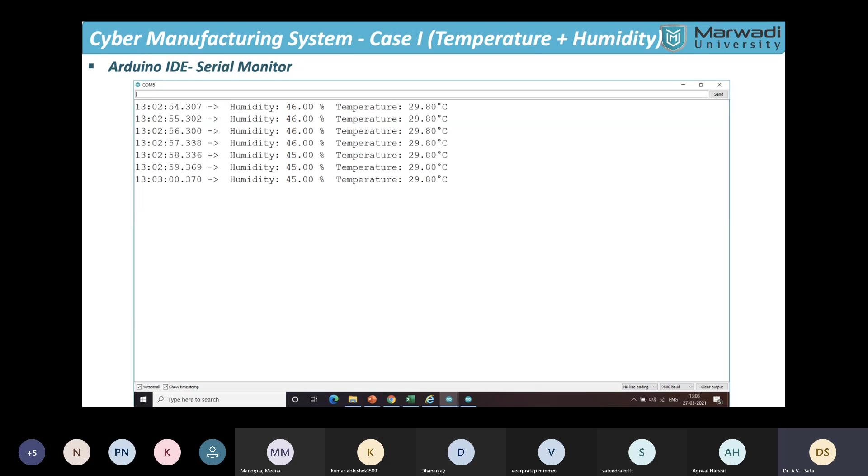We are going to implement the similar thing for the K type thermocouple in the next session, in the Sunday hands-on session, since many of you have opted for the project related to monitoring the temperature of a furnace or so. Then it can be easily understood how to capture the data from the melting furnace or heating furnace in the range of around 1200 or 1300 degrees centigrade.

So basically that's what we did for the manufacturing system, and now we are going to identify our own typical cyber physical system. We have lots of options available for the sensor, as you might have selected your own cyber physical system, based on the parameter you have opted for. For example, if you are going to measure power consumption, there is no sensor available to directly capture power consumption, so you need to disintegrate your thought into basic available sensors.

For example, power will be disintegrated into either voltage or current, and then you are going to integrate with that sensor, along with the timer.

Whenever we have voltage, current, and a timer, we'll be in a position to understand how the power consumption will happen. The sensor will give you an idea about voltage or current, maybe through time, but in the programming side, you need to do a certain kind of computation.

The same way, suppose someone has already selected a project related to a viscosity cup, in which we are going to measure the viscosity or flow of the liquid. We utilize the time from which the flow started, or capture the moment where the flow stops. In between, we compute through the program and find out the difference of time.

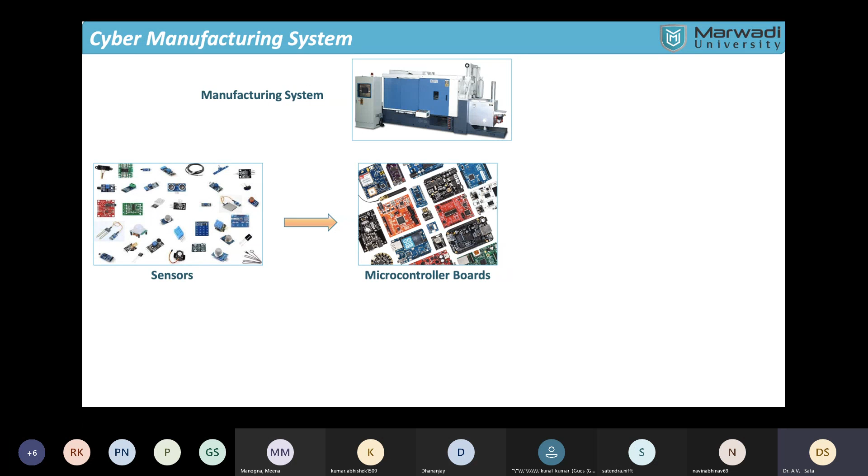So this is how the selection of the microcontroller happens, and the sensor selection also depends on that. So while selecting the sensor, you should keep in mind which kind of microcontroller board you are going to use. And there are certain peripheral requirements as well.

Sensors and microcontroller boards always deal in terms of very low voltage, as well as DC power supply. Commonly we have either single phase AC power supply or three phase AC power supply as far as our industrial power supply is concerned. So it becomes very critical to transform that alternating current or AC power supply into DC power supply, and then have a better connectivity in terms of cable with the power supply.

Whatever connections happen between your microcontroller, sensors, and peripheral requirements like SMPS, there has to be a PCB - printed circuit board - on which we print the circuit. Special skills are required to design and print the PCB. We are not in an electronics class, but these peripheral things need to be understood while developing your own cyber physical system or cyber manufacturing system. Sensors involve physics, microcontrollers involve electronics, and designing and printing the PCB, plus selecting the most appropriate power supply source, all play important roles.

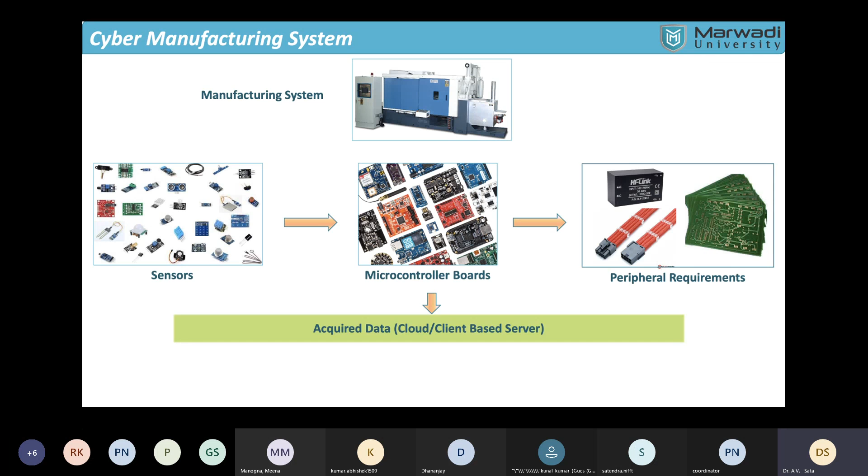We have reached up to this stage for the temperature purpose only. Then next Sunday, we will understand how to represent this data onto the cloud-based application, Android, or dashboard. Then slowly we'll repeat the same concept for 2 or 3 other types of sensors.

And once we have sufficient data, or you may also have sufficient data, we'll run that data for the prediction purpose. Once the prediction is done, we'll discuss the data analytics part. So prediction we are going to do with the help of statistical approach as well as

artificial neural network based approach, where we utilize the data for training and testing purpose. Then in the data analytics, we will try to find out why it is happening. So the first part gives you an idea about what is going to happen, and the next part gives us an idea about why it is going to happen.

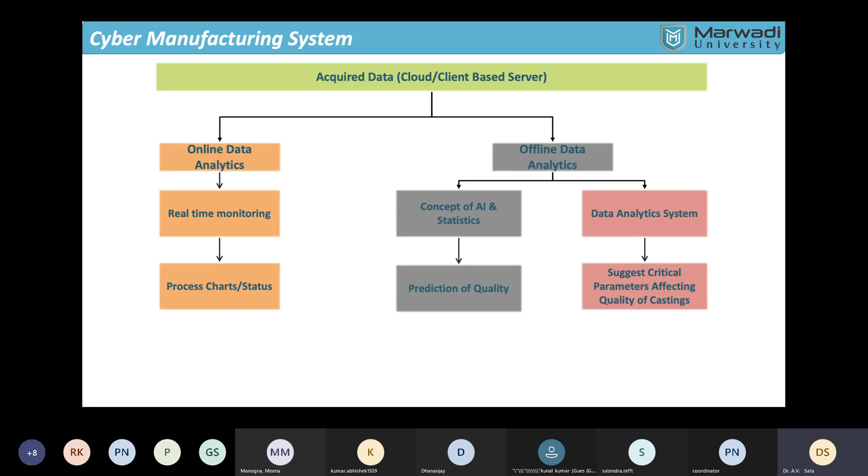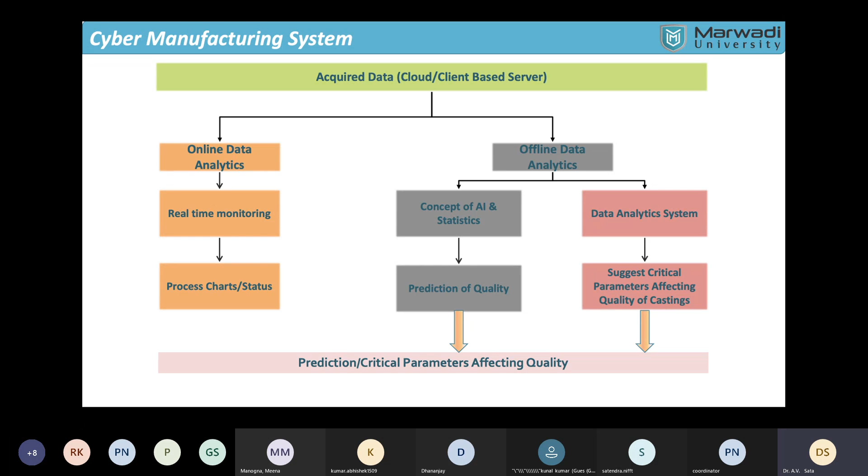So this is the overall thing, right? We'll capture this information, and it will go back to the original physical system, to check whether the prediction is going to happen, so you want to change the cycle parameter or not. If you have a list of parameters affecting the performance of the system, you feed this data back to the system again. And then the entire cyber physical system is considered to be developed.

So now, next time, I'll quickly go through the demonstration of what we are supposed to do in Sunday's class. We have seen in the earlier demonstration that we installed the DHT11 library, captured the information, and stored it onto our server.

But now our job is to transfer the data through the Wi-Fi module. Through the Wi-Fi connection or internet, we are going to transfer the data to the server, or cloud, and from that we'll see it in the form of charts or other forms that you would like to have.

So for that, there's a little extension you need to do with the Arduino. Just go into Google and search for 'WiFi.h library import, WiFi.h download', and you will see GitHub results available. Click that, and it will direct you to GitHub, where you will find the code to download in zip form, and then install it to your own Arduino setup.

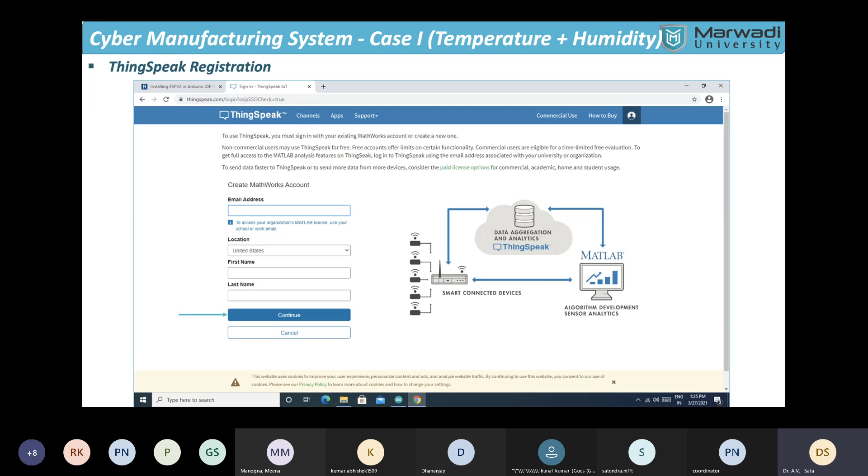Once you enter the password, which should be at least 8 letters with one capital, one number, and one small letter - if you fulfill that condition, it will ask you to continue, and then lead to some questions.

You can select - I'd suggest the last two options, either 'teaching or research' or 'school or student use' - and tell us something about your project. You can say 'development of a cyber physical system' for a particular course or something. Once you press OK, it will take you to this dashboard.

So up to this point, this is what we will be doing now.

So I'm just waiting for that - I think it will not take more than 2-3 minutes to do. So I would suggest you start the process on that, right?

So start that thing. Then it will take you to this channel. Commercial work, student use, sir. Sorry, your voice is not coming. Yeah.

Should I use the option commercial work or student use? Whatever you can write, no problem in that, right? But I would suggest you go with the last two options. They will actually provide a good idea about the student version, and it's a very good tool to use. Right? So once you go there...

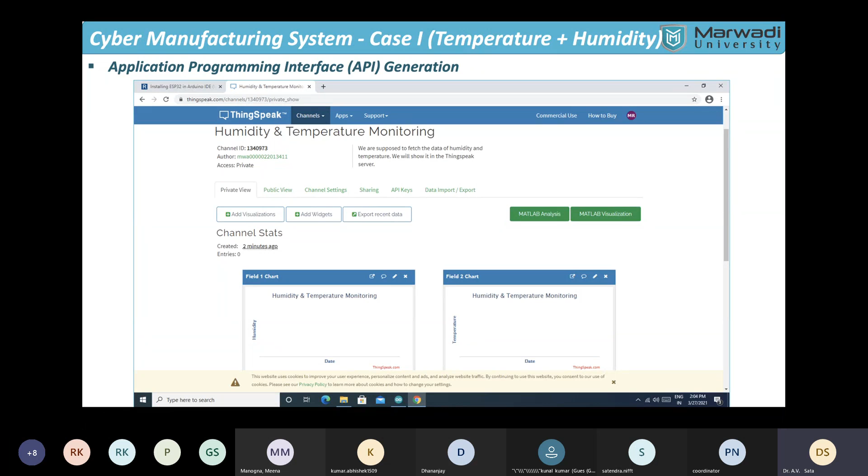You can also select how the data will be visualized, right, in terms of two channels—say humidity and temperature both. So here you can see how the charts will be generated.

You can also see that at widgets, you can change how the data will look, whether it is going to be utilized as numerical values, gauge, or lamp indicator, whatever you want to see. So numerical indicator can be used like this. Same way you can also select different forms of data, like gauge, if you want to see the temperature in terms of gauge. Charts are also available, so no problem in that, right?

Then, sorry to trouble you again, but you need to go to your Play Store, Google Play Store. I assume everyone is using Android phone, but the same application is also available on the Apple Store. You just need to go through that and type ThingView, and you will find the application that you are supposed to install on your respective cell phone.

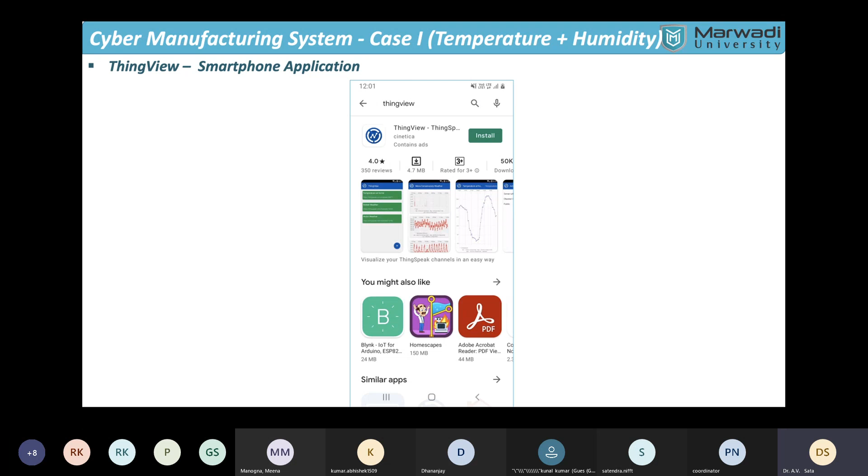So again, the name is ThingView. Earlier one was ThingSpeak, now it is ThingView, right? So once you will go there, the similar application is also available on iOS. So whether you are using the Apple device or Android device, you will be in position to install it. Just you need to install it.

Once you install and open it, it will show the first page like this. It will show that you don't have any channel for that. So here you can add the channel. Once you press the plus button, or addition of the channel, it will take you to add all my channels, and then here you need to provide your URL and the API key.

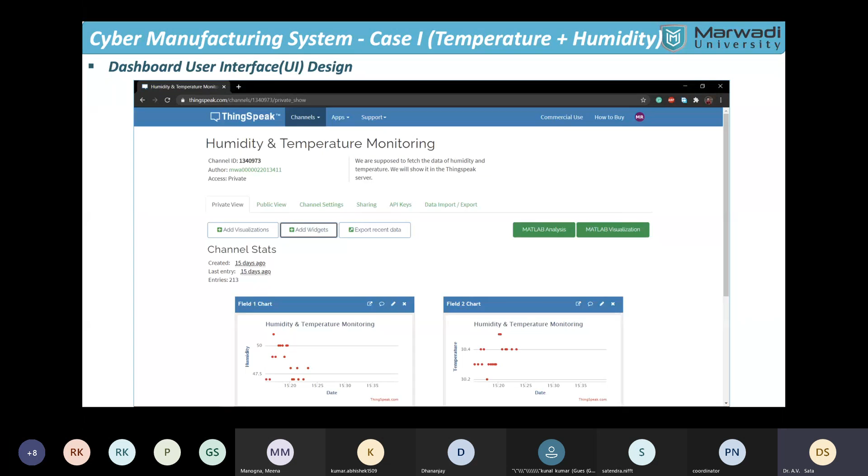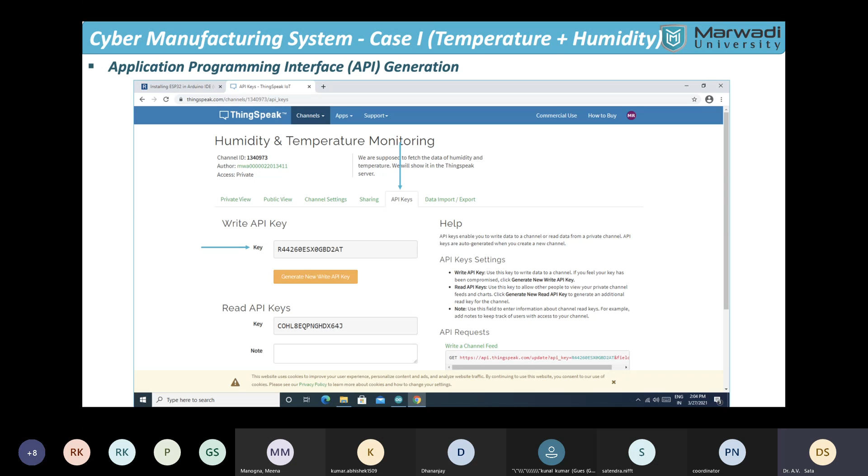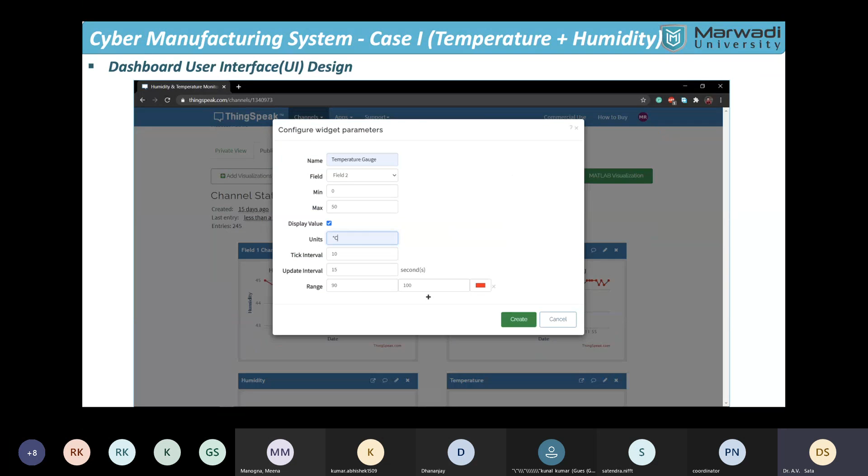So from here you can take this API key that you are supposed to enter over here, which is also available here. So there are two different kinds of API you are dealing with. This API that we were earlier storing will be utilized into the Arduino. So as I told you, from sensor to this database, different API will be required, which starts with R, and another API that you require, which streams the data from this server of ThingSpeak to my Android.

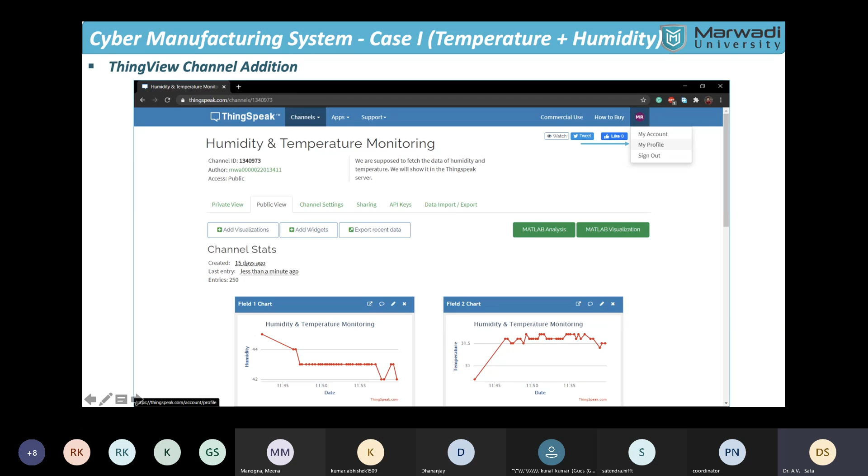So here you will see that different API will be required. Once you go into my account, my profile, there will be a user API key which starts with V, and that you are supposed to enter over here. Then it will connect the Android to the ThingSpeak. The earlier API was used to connect the Arduino with ThingSpeak.

So now the entire channel has been created from the Arduino to ThingSpeak to ThingView, right? Once you enter that, it will show whatever channels you have stored, and you are supposed to save it, and then it will go to that. So any confusion up to this part? Then we will understand how to import the code into the Arduino for connecting the DHT11 with Wi-Fi.

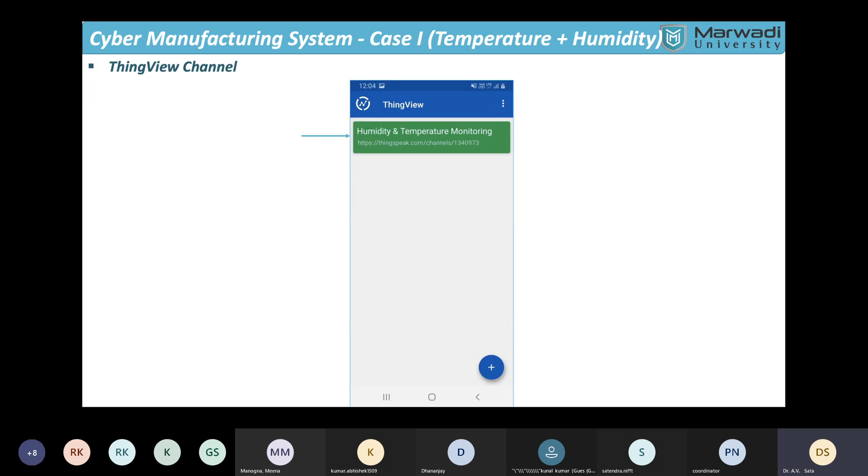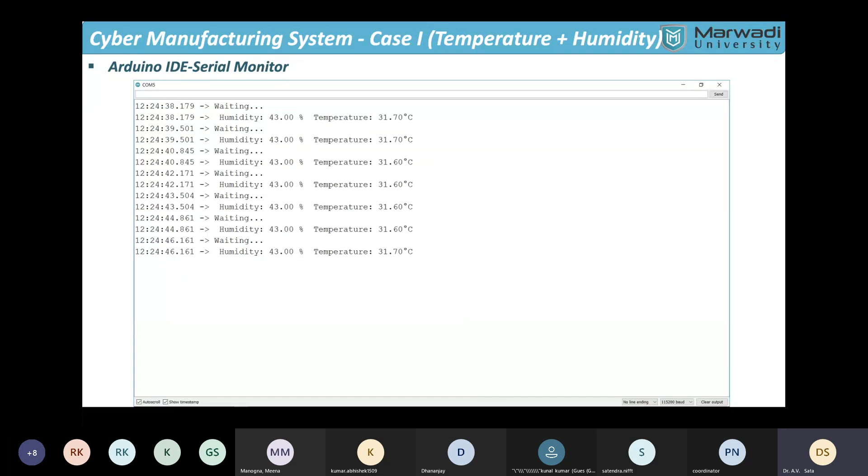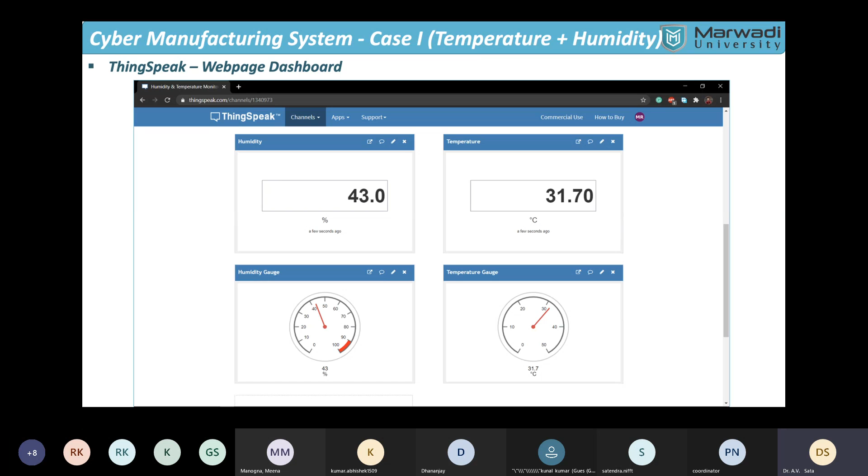Once you finish that code, the data will be streaming to ThingSpeak like this. We have also utilized a few widgets so that numerical values are possible to stream, and the same way gauges are also possible. This is the dashboard version of ThingSpeak, and a similar version is also available on the ThingView application where you can easily stream the data and visualize it, right?

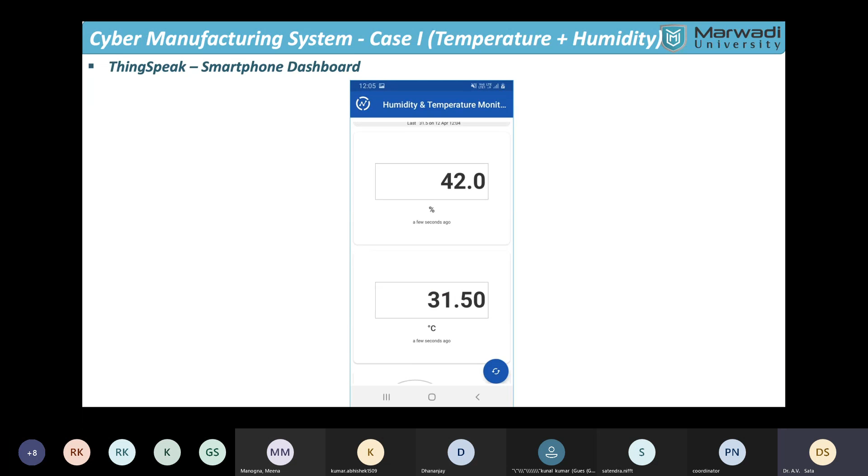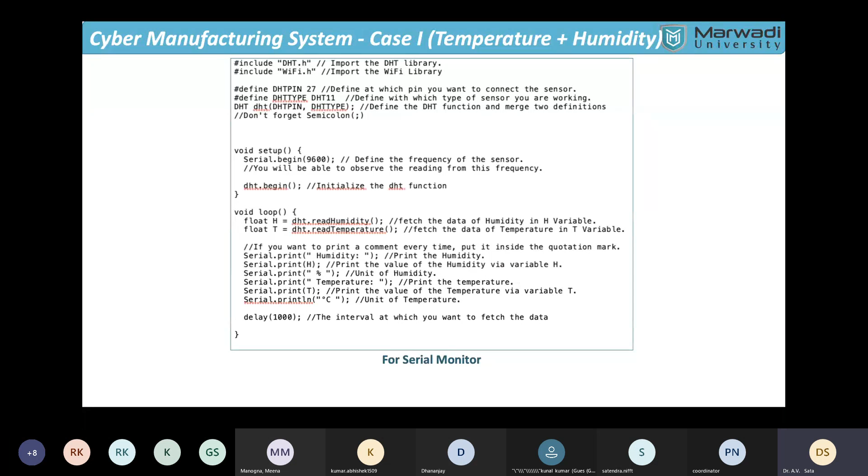So I hope you will go through this video and start to practice with DHT11 and ESP32 if you have not received it. Then again, with the help of minor modification, if you have your own physical system, minor modification will happen in this code. Same way in this code, to have your own thermocouple or timer or maybe anything, so minor modification will happen in this.

So I hope you get what I am trying to convey, and next Sunday we'll have a demonstration on the same. We are going to connect the DHT11 with Wi-Fi and stream the data to ThingSpeak and ThingView. We will also see, if time permits, how to connect the K-type thermocouple and stream the data to the server. So we'll understand the DHT11 and K-type thermocouple separately. Then we will combine all the data and see how the codes are going to change and how things will work out. Right? So I think that's it from my side, at least for today's session.

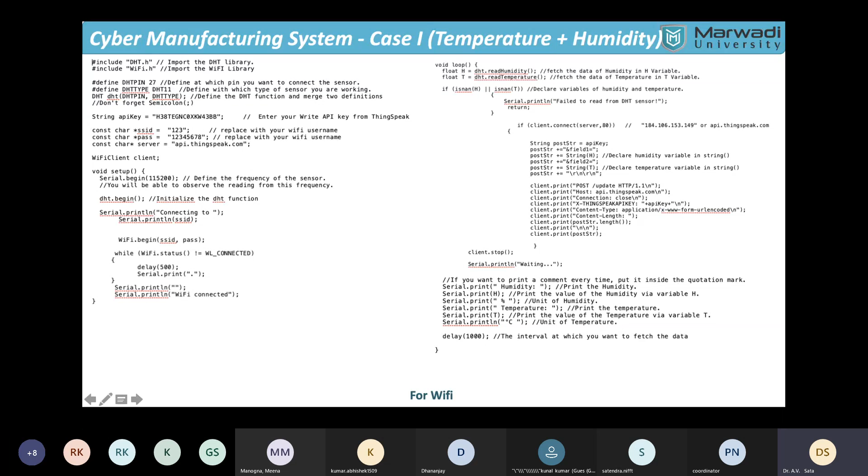And I hope everyone has... yeah, I think Prem Singh, Abhishek, Meena, Satyendra, I think all have entered the data into the form I shared. Still, I think many of you are missing.

Oh, I think Prem Prakash Singh has entered too many things, right? Parameter associated with that. So the selected physical system is DISAMATIC. Okay, and sand blow pressure. It means it is kind of machine what you are using, right? Into casting, high pressure molding machines, sir. It's a high pressure molding machine used for making this, prints and molding, sir.